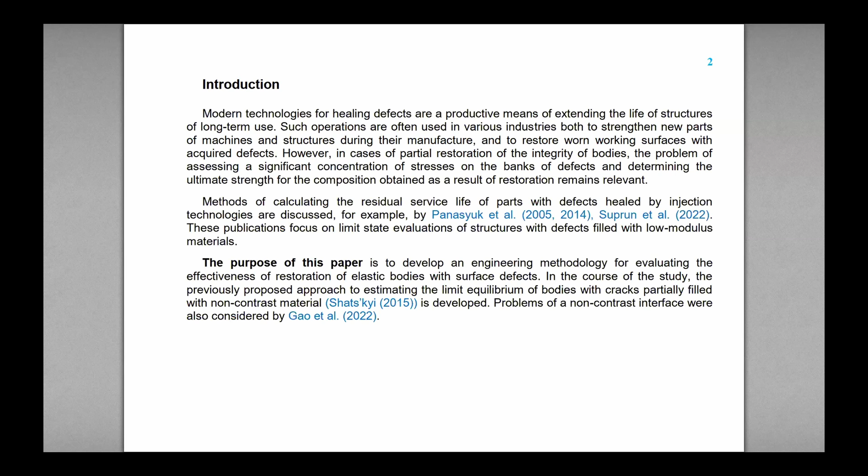The purpose of our paper is to develop an engineering methodology for evaluating the effectiveness of restoration of elastic bodies with surface defects. In the course of the study, the previously proposed approach to estimating the limit equilibrium of bodies with cracks partially filled with non-contrast material is developed. Problems of a non-contrast interface were also considered by Gao et al.

Model of partially healed crack. A crack in a deformed body is understood as a displacement discontinuity surface omega 0. As a result of the restoration of the integrity of the body in some domain omega healing, we get a new object, a partially healed crack with a discontinuity of movements on the surface omega equals omega 0 minus omega healing. This domain can be generally multi-connected.

For simplification, we adopted the following hypotheses. The first, the elastic properties of the body with a healed crack are preserved. It means the details of the rheology of the connecting layer are neglected. The second hypothesis: the specific surface energy of separation of surfaces, or fracture toughness of the material in the healed area, is generally different from the corresponding values in a solid body.

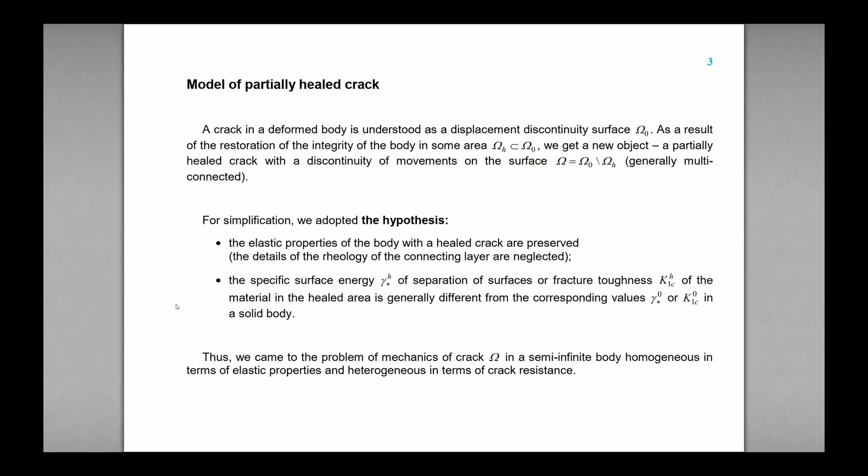The degree of crack healing was described by two parameters. The ratio of crack resistance of the body and aggregate materials, eta, which characterizes the quality of the process of healing, as well as the ratio of the areas of the healed domain and the initial crack. This parameter describes the quantitative degree of recovery. The efficiency of healing was defined as a ratio of the limit values of the load for the healed and primary cracks.

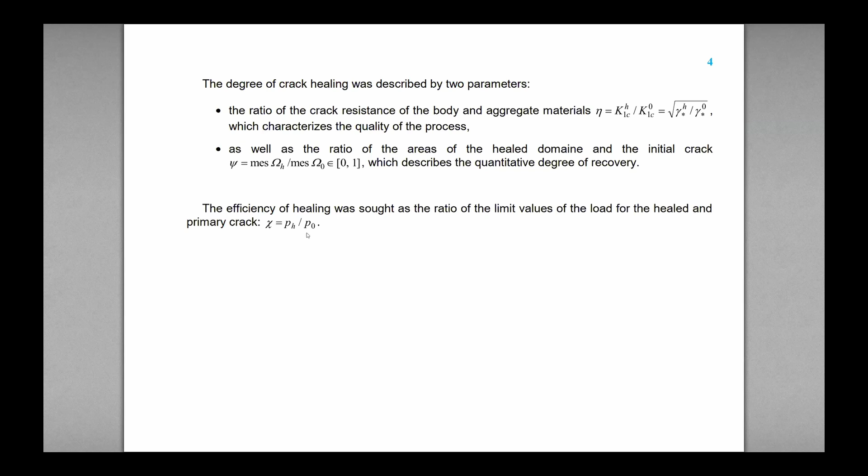Okay. We started from the case of a single surface crack. This is the assumption of the plane problem of the theory of elasticity. We consider a half plane with edge cracks of normal separation of length L0. We will alternately analyze two options for crack healing: near the tip of defects and near the edge of the half plane.

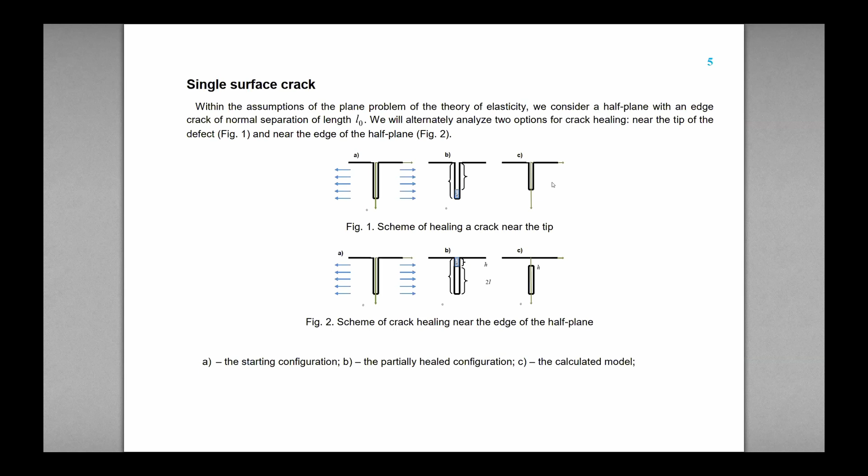Position A is the starting configuration. Positions B represent the partially healed configuration, and positions C represent the model for calculation.

In case of healing near the tip, in the starting configuration, the stress intensity factor is known. Following the Griffith criterion, we apply the ultimate load for a half plane with the edge crack. For a shortened crack with the length L, we have formula 2. We define the desired healing efficiency for a single crack as the ratio of limit loads 2 and 1. Equation 3.

Here parameter eta describes the quality of healing, parameter psi describes the quantitative effect of healing. There is the analytical result.

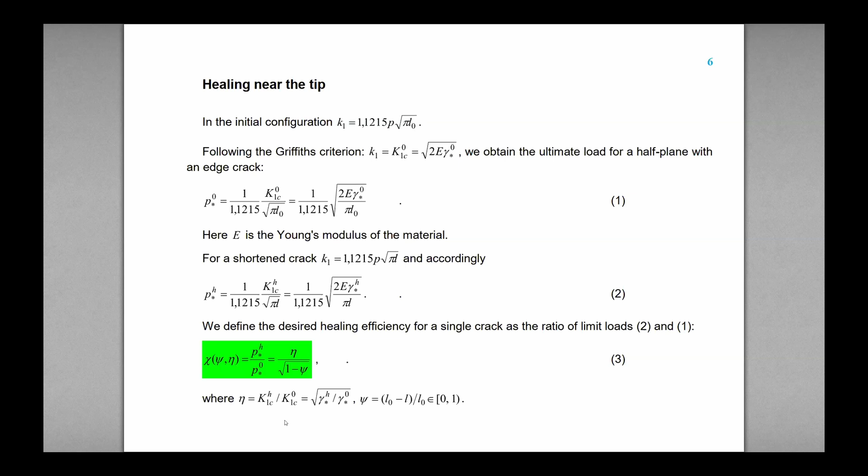In the case of healing near the edge of the half plane, we have also analytical results. As a result of healing of the defect to the given depth, we have internal cracks of length 2L located on the segment, this segment as the calculation model. In this case, we have an internal crack. Right? The following relations are obvious.

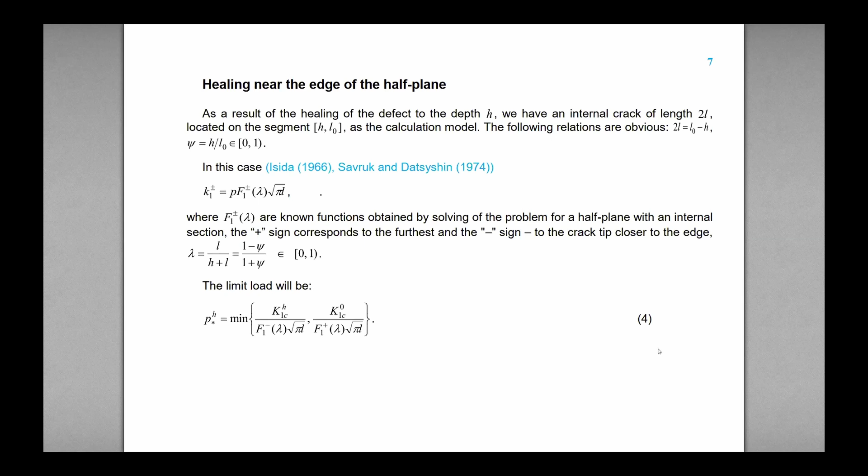In this case, we can obtain the stress intensity factors, where F1 are known functions obtained by solving the problem for a half plane with an internal crack. The limit load will be by formula 4, and by comparing expressions 4 and 1, we finally got the formula for the healing efficiency. Formula 5.

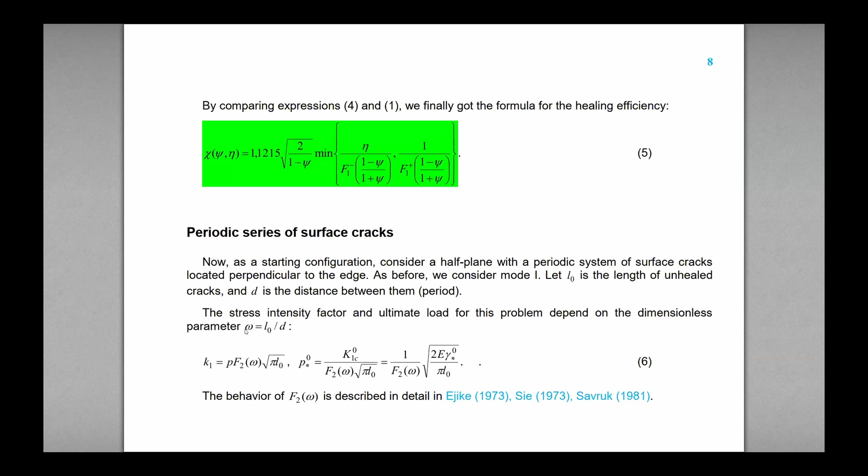The case of a periodic series of surface cracks. Now, as a starting configuration, we consider a half plane with a periodic system of surface cracks located perpendicular to the edge. As before, we consider the fracture mode 1. L0 is the length of unhealed cracks, and D is the distance between them. This is a period of location. The stress intensity factor and ultimate load for this problem depend on the dimensionless parameter omega, L0 divided by D.

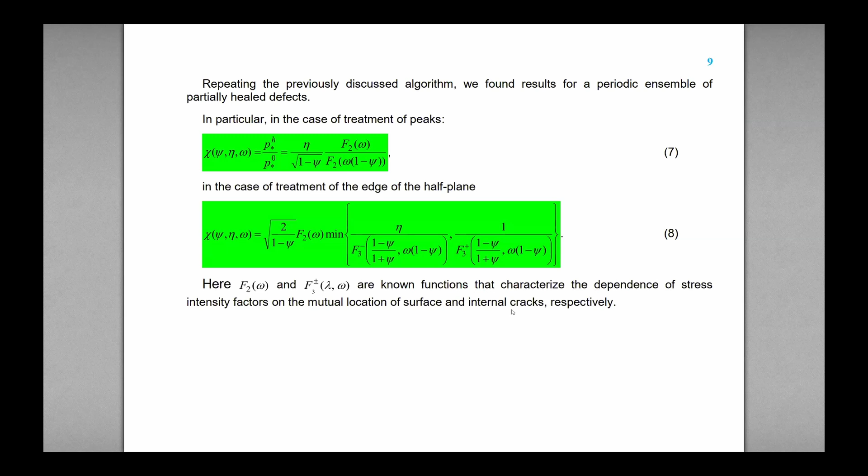Repeating the previously discussed algorithm, we found results for a periodic ensemble of partially healed defects. In particular, in the case of treatment of tips, it's formula 7. In the case of treatment of the edge of the half plane, it's formula 8. Here, F2 and F3 are known functions that characterize the dependency of the stress intensity factor on the mutual location of surface and internal cracks, respectively.

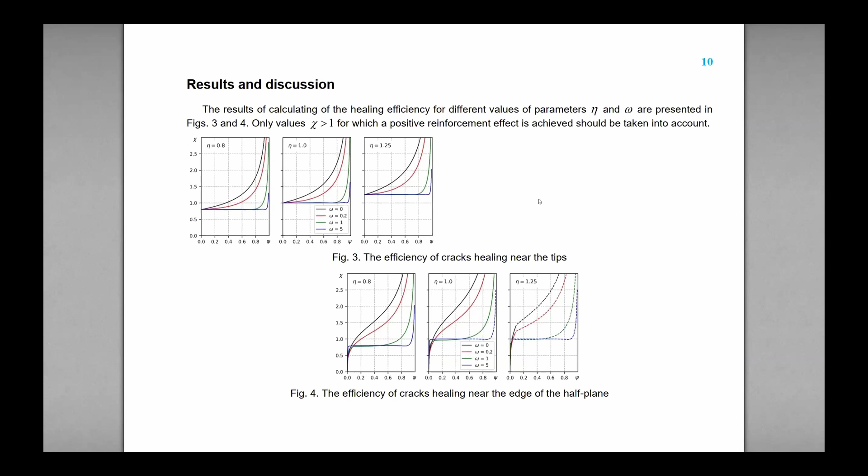Conclusions. The paper developed a model of crack healing with a non-contrast material in bodies with surface defects. In analytical and numerical form, quantitative estimates of healing efficiency are established depending on 3 parameters: degree of filling of cracks, crack resistance of the newly formed interface, and mutual location of cracks. Body restoration near the surface is shown to be generally a better solution than healing near the defect vertices.